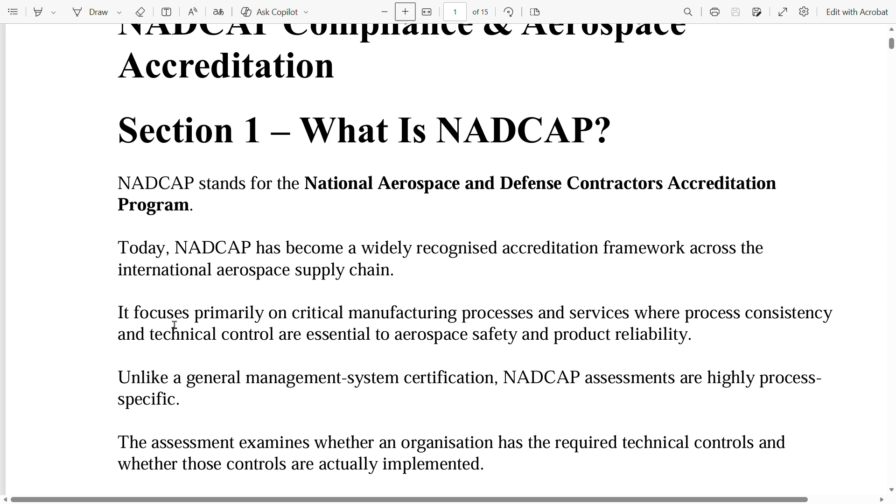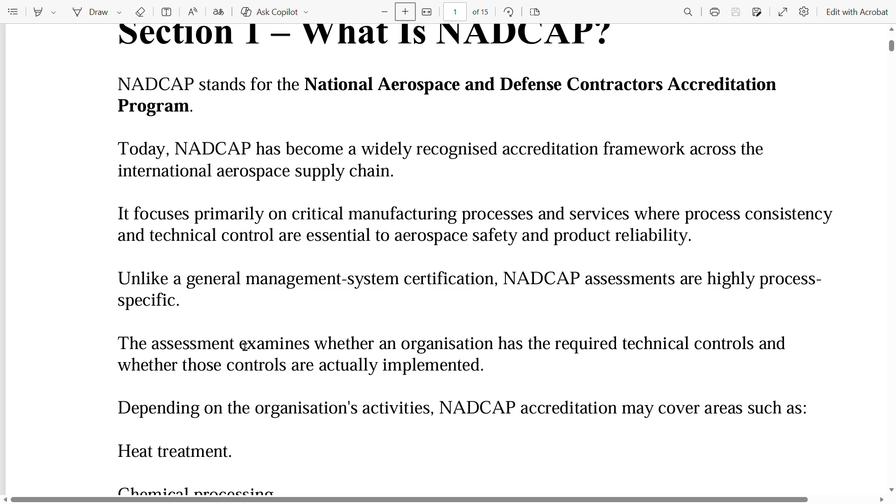Today, NADCAP has become a widely recognized accreditation framework across the international aerospace supply chain. It focuses primarily on critical manufacturing processes and services where process consistency and technical control are essential to aerospace safety and product reliability. Unlike a general management system certification, NADCAP assessments are highly process specific. These assessments examine whether an organization has the required technical controls and whether those controls are actually implemented.

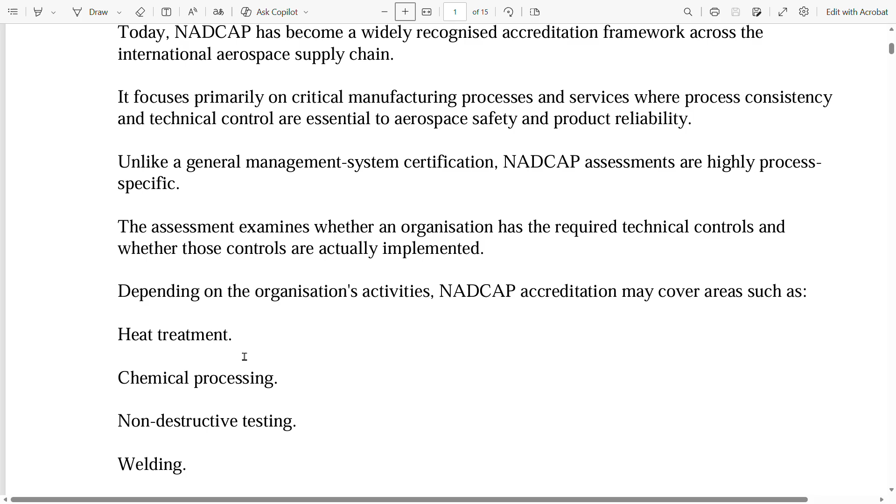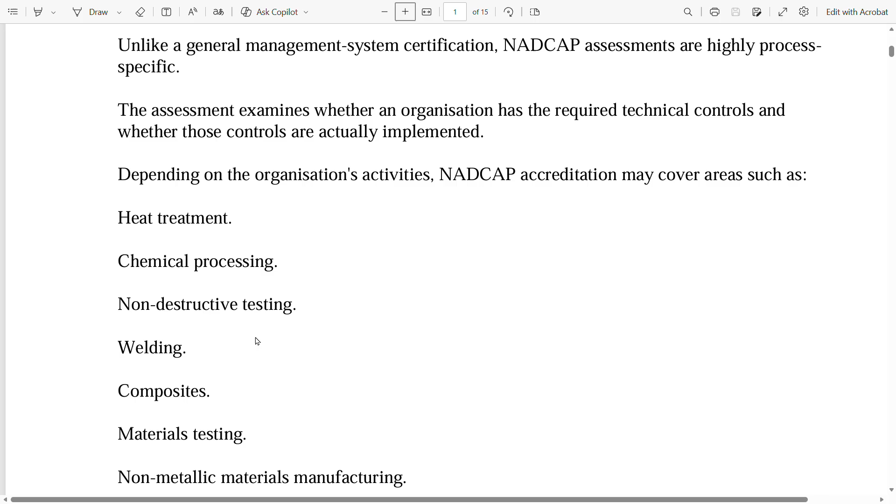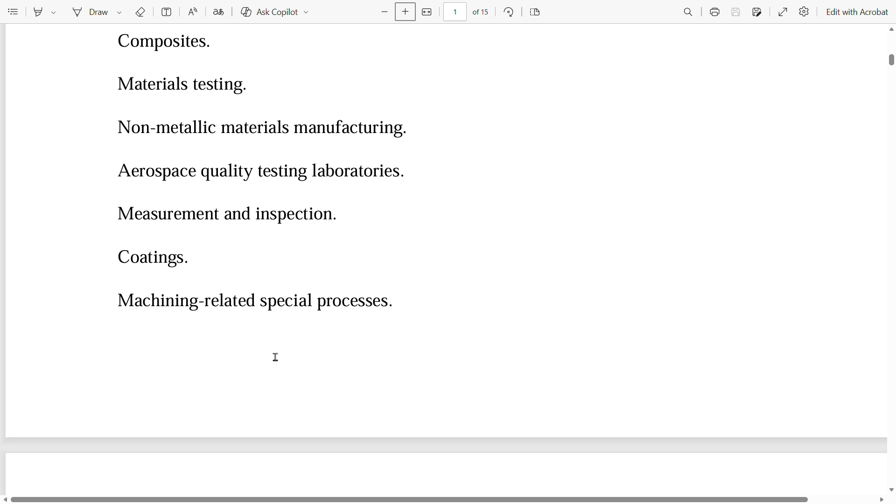Depending on the organization's activities, NADCAP accreditation may cover areas such as heat treatment, chemical processing, non-destructive testing, welding, composites, materials testing, non-metallic materials manufacturing, aerospace quality testing laboratories, measurement and inspection, coatings, machining, related special processes, and other critical aerospace manufacturing and testing activities. The exact accreditation scope depends on the organization's processes and applicable NADCAP requirements.

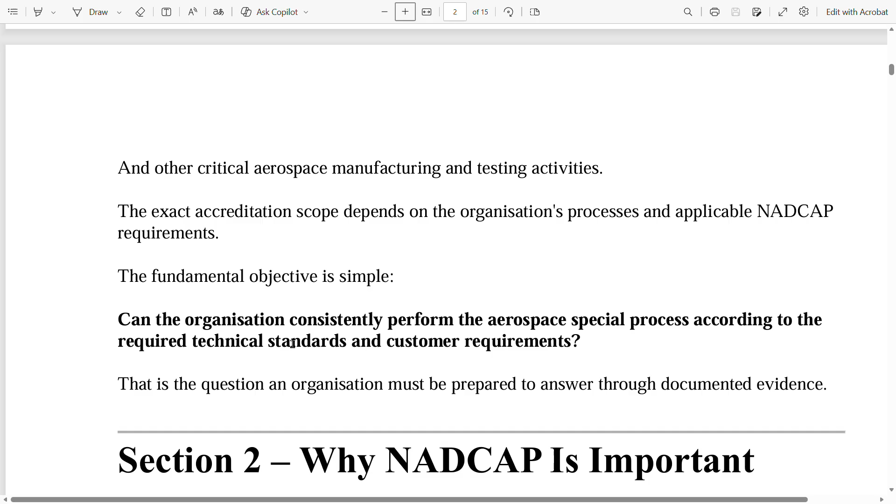The fundamental objective is simple: can the organization consistently perform the aerospace special process according to the required technical standards and customer requirements? That is the question an organization must be prepared to answer through documented evidence.

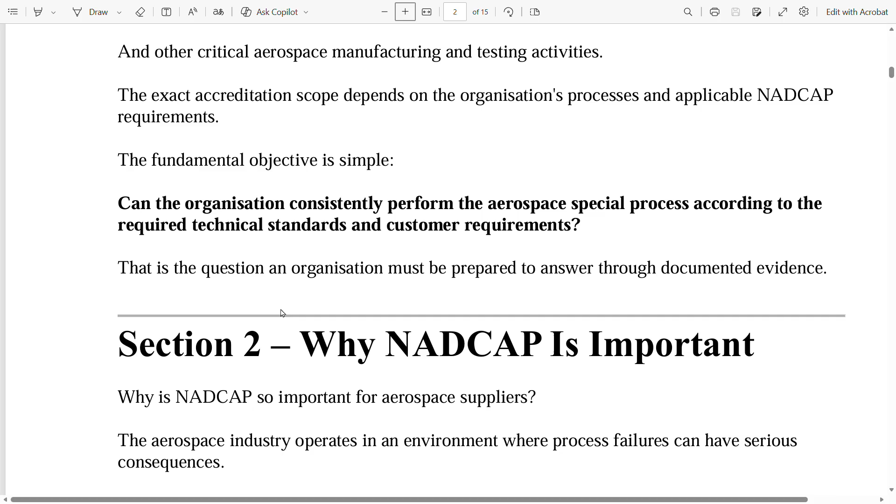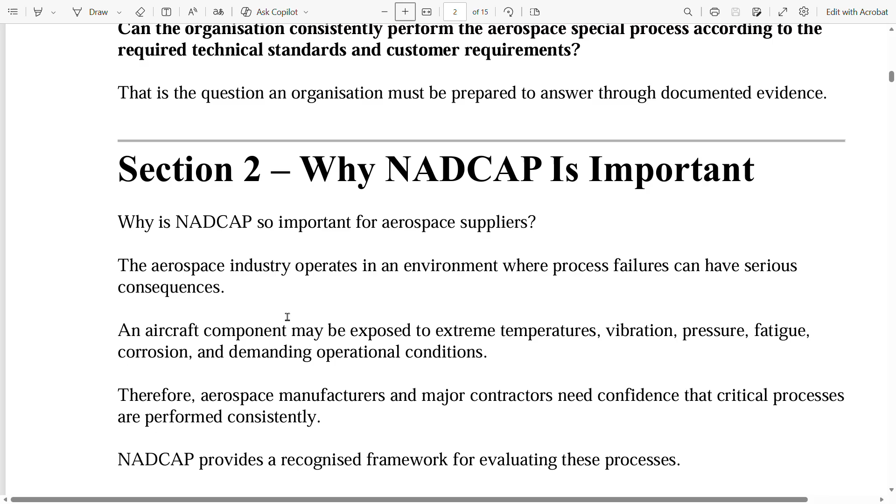Now, why is NADCAP important? Why is it so important for aerospace suppliers? The aerospace industry operates in an environment where process failures can have serious consequences. An aircraft component may be exposed to extreme temperatures, vibration, pressure, fatigue, corrosion, and demanding operational conditions. Therefore, aerospace manufacturers and major contractors need confidence that critical processes are performed consistently.

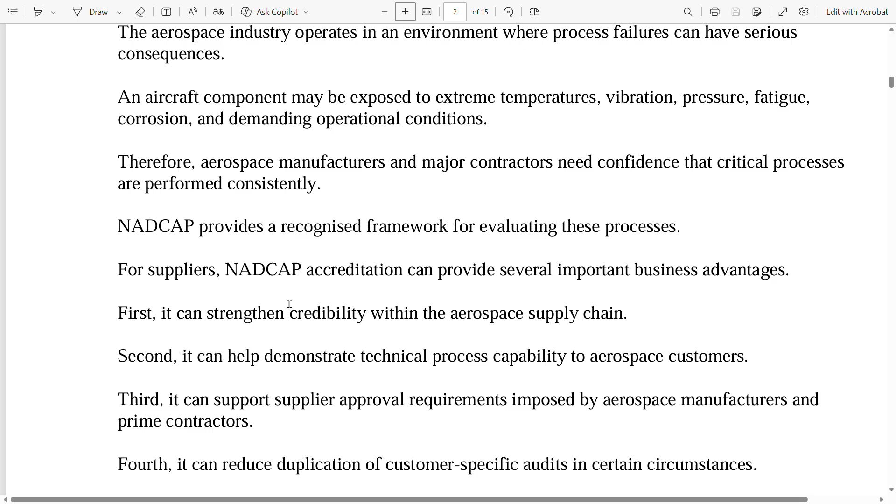NADCAP provides a recognized framework for evaluating these processes. For suppliers, NADCAP accreditation can provide several important business advantages. First, it can strengthen credibility within the aerospace supply chain. Second, it can help demonstrate technical process capability to aerospace customers. Third, it can support supplier approval requirements imposed by aerospace manufacturers and prime contractors.

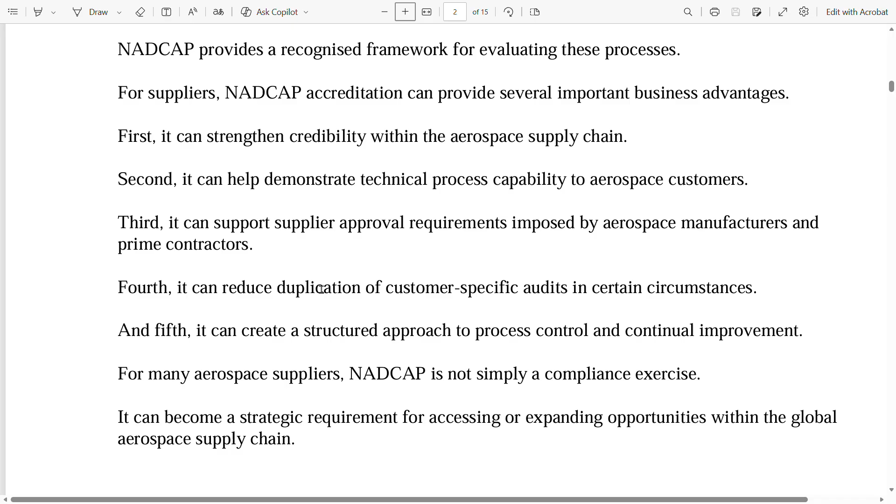Fourth, it can reduce duplication of customer specific audits in certain circumstances. And fifth, it can create a structured approach to process control and continual improvement. For many aerospace suppliers, NADCAP is not simply a compliance exercise. It can become a strategic requirement for accessing or expanding opportunities within the global aerospace supply chain.

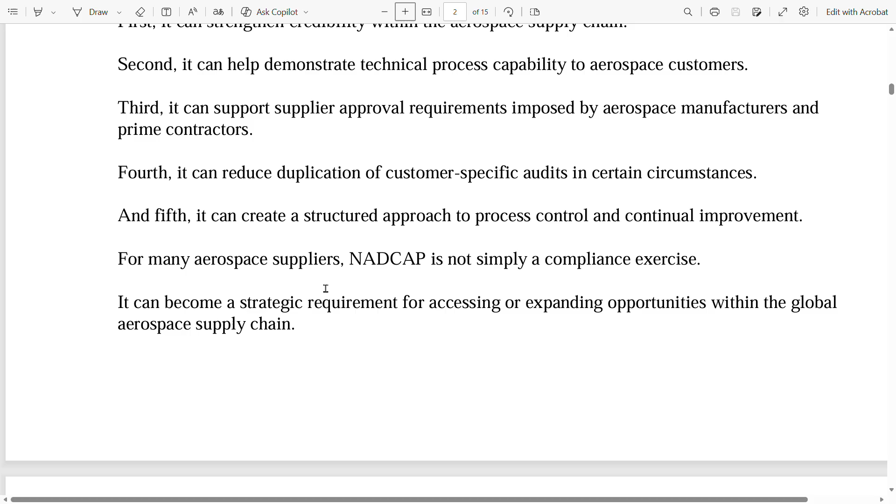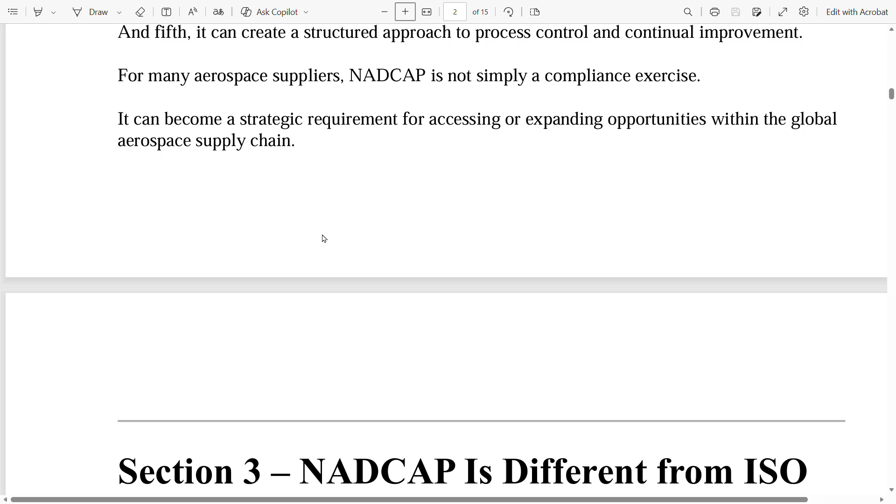Now, Section 3: NADCAP is different from ISO 9001. As we know, ISO 9001 is the standard for quality management system, a generic standard applicable to all organizations. So one common misunderstanding is to consider NADCAP equivalent to ISO 9001. It is not. ISO 9001 focuses on the organization's quality management system. NADCAP focuses much more deeply on specific aerospace processes.

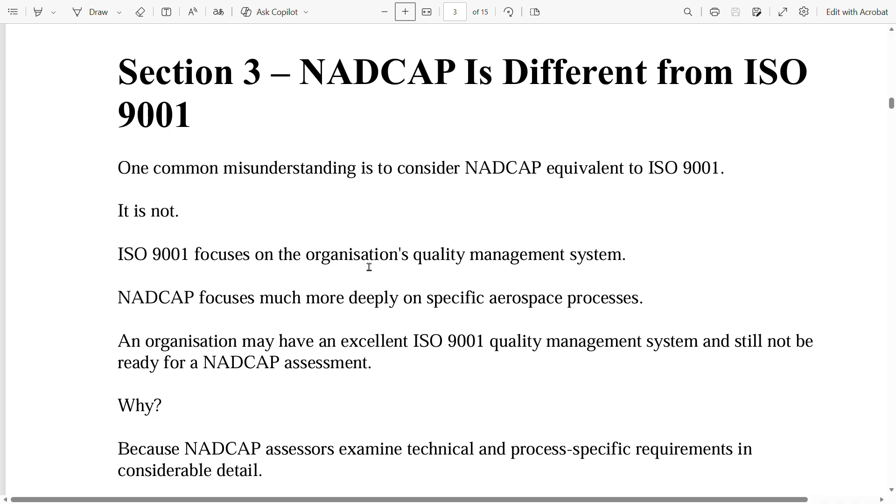An organization may have an excellent ISO 9001 quality management system and still not be ready for a NADCAP assessment. Why? Because NADCAP assessors examine technical and process specific requirements in considerable detail.

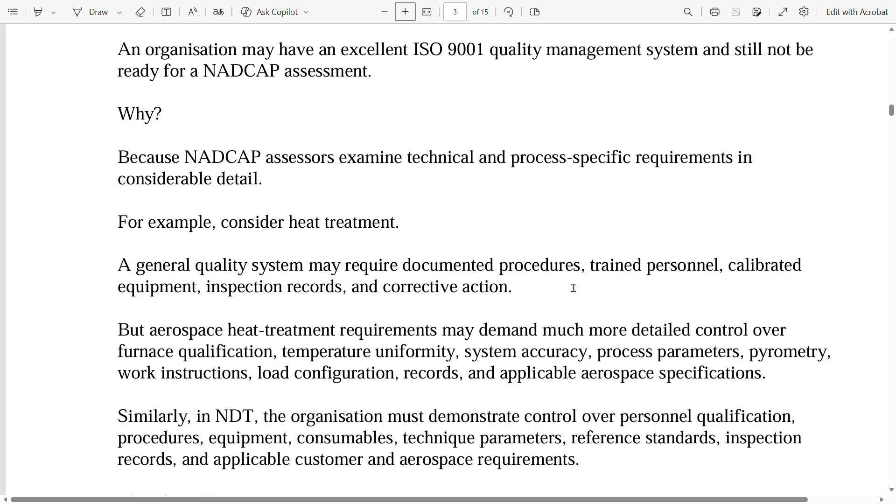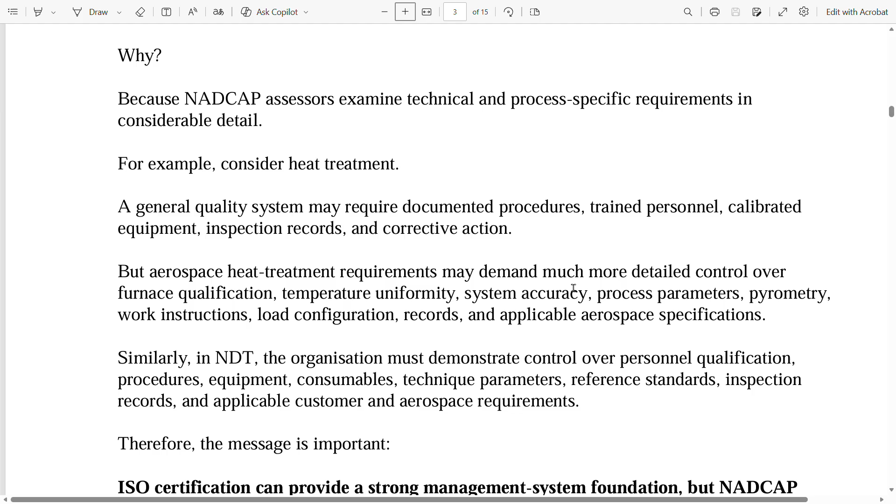For example, consider heat treatment. A general quality system may require documented procedures, trained personnel, calibrated equipment, inspection records, and corrective action. But aerospace heat treatment requirements may demand much more detailed control over furnace qualification, temperature uniformity, system accuracy, process parameters, pyrometry, work instructions, load configuration, records, and applicable aerospace specifications.

Similarly, in NDT, the organization must demonstrate control over personnel qualification, procedures, equipment, consumables, technique parameters, reference standards, inspection records, and applicable customer and aerospace requirements. Therefore, the message is important: ISO certification can provide a strong management system foundation, but NADCAP requires process-specific technical readiness.

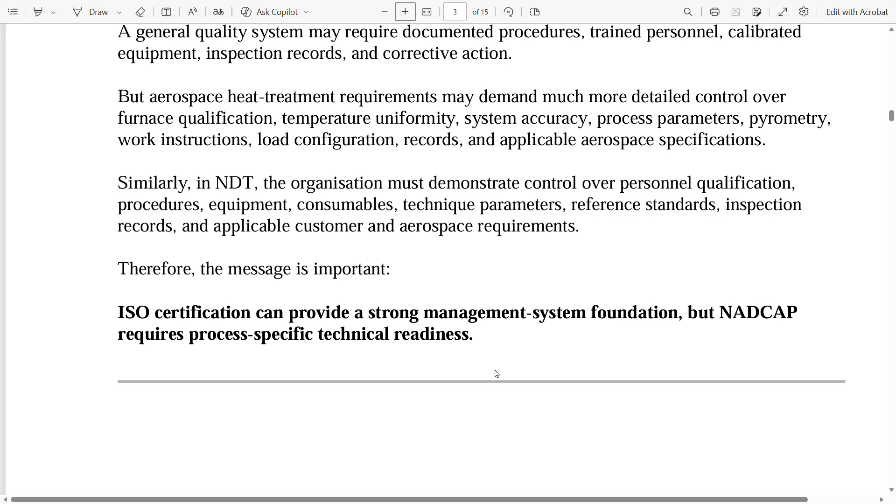Now section 4: major NADCAP process areas. Let us now look at some of the major areas where NADCAP accreditation may apply. First, non-destructive testing, NDT. NDT is a critical aerospace inspection activity.

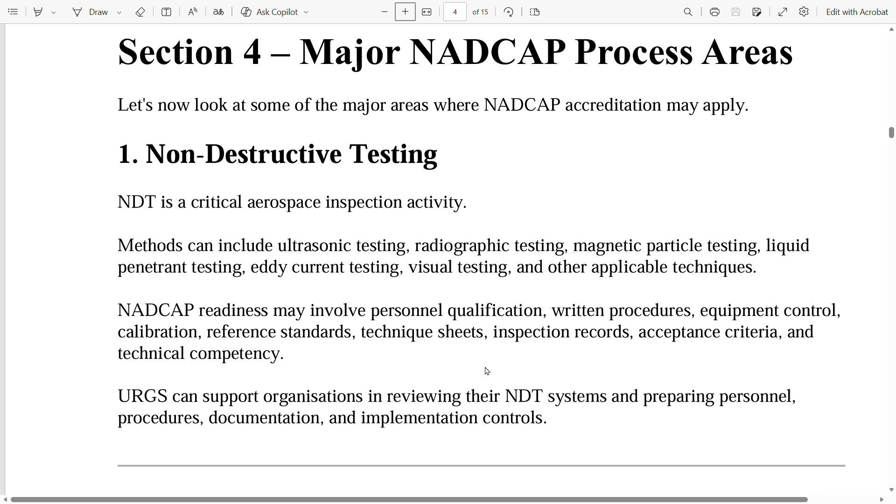Methods can include ultrasonic testing, radiographic testing, magnetic particle testing, liquid penetrant testing, eddy current testing, visual testing, and other applicable techniques. NADCAP readiness may involve personnel qualification, written procedures, equipment control, calibration, reference standards, technique sheets, inspection records, acceptance criteria, and technical competency.

URGS can support organizations in reviewing their NDT systems and preparing personnel, procedures, documentation, and implementation controls.

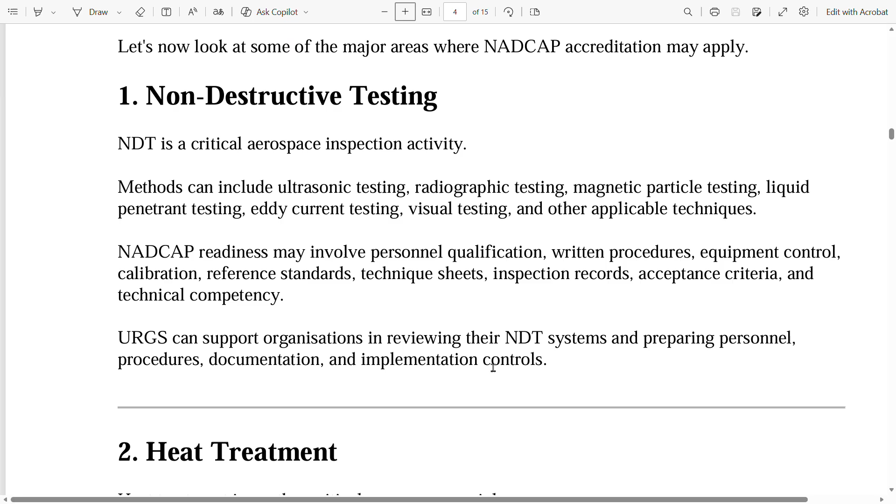Now, second, heat treatment. Heat treatment is another critical aerospace special process. Organizations must demonstrate effective control of furnaces, temperature measurement systems, process parameters, recipes, work instructions, load configurations, calibration, pyrometry, records, and process monitoring.

URGS can support heat treatment organizations through gap assessment, documentation review, internal audits, training, process control evaluation, and corrective action support.

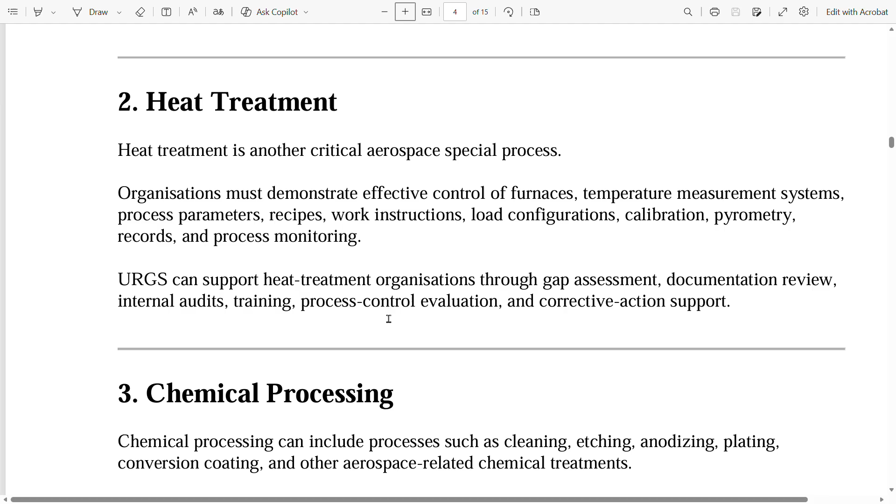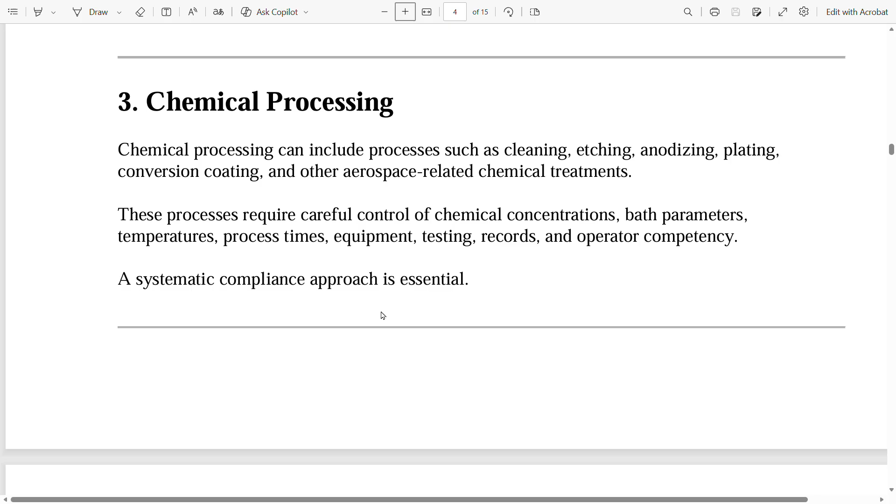Third, chemical processing. Chemical processing can include processes such as cleaning, etching, anodizing, plating, conversion coating, and other aerospace related chemical treatments. These processes require careful control of chemical concentrations, bath parameters, temperatures, process times, equipment, testing, records, and operator competency. A systematic compliance approach is essential.

Fourth, materials testing laboratories. Aerospace laboratories must demonstrate reliable testing capability. This can include mechanical testing, metallography, chemical analysis, hardness testing, microstructural evaluation, and other applicable testing. Laboratory equipment, calibration, test methods, personnel competency, sample identification, traceability, records, and technical procedures all become important.

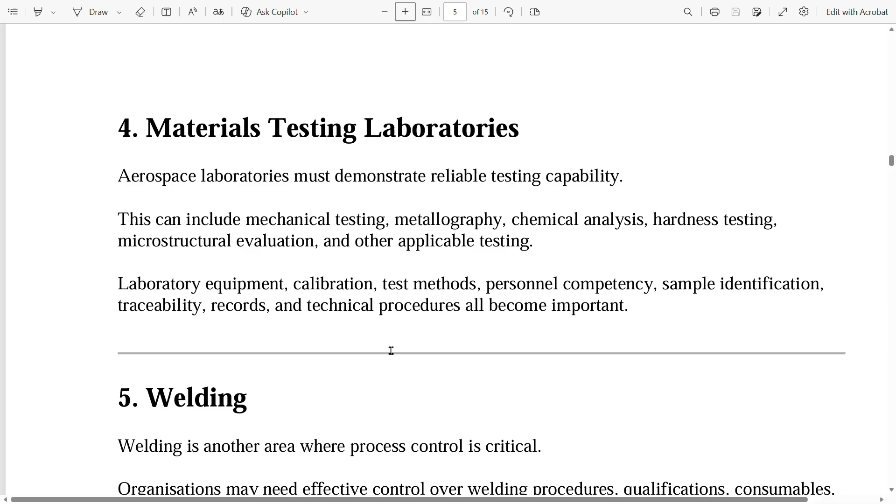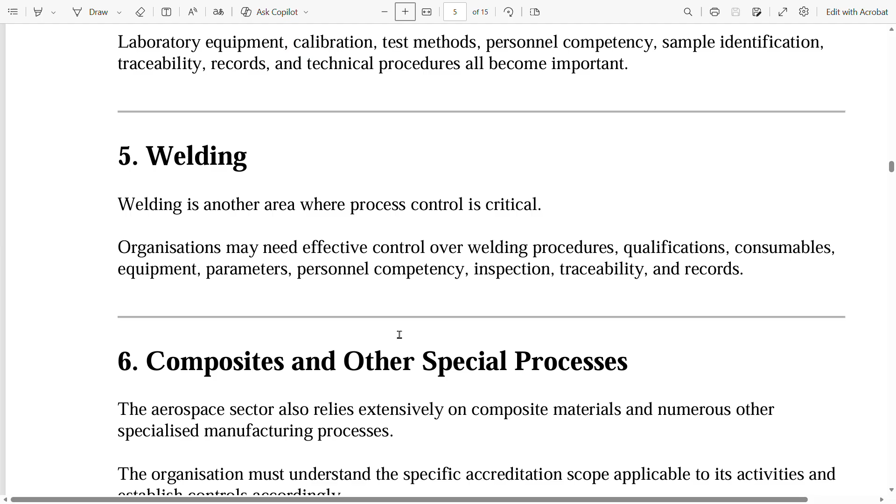Fifth, welding. Welding is another area where process control is critical. Organizations may need effective control over welding procedures, qualifications, consumables, equipment, parameters, personnel competency, inspection, traceability, and records. Then sixth, composites and other special processes.

The aerospace sector also relies extensively on composite materials and numerous other specialized manufacturing processes. The organization must understand the specific accreditation scope applicable to its activities and establish controls accordingly. The key principle remains the same: define the process, control the process, demonstrate the process, and retain objective evidence.

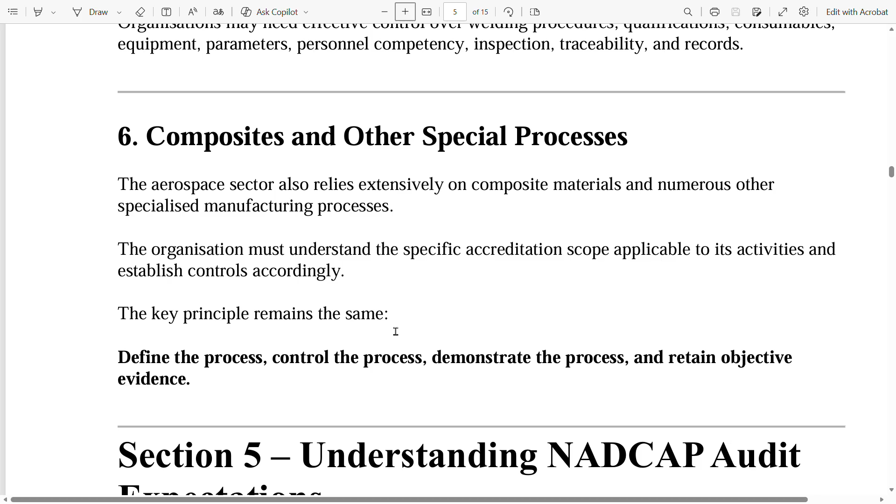Now section 5, understanding NADCAP audit expectations. NADCAP assessments are evidence driven. It is not enough to tell an assessor that a process is controlled. The organization must be able to demonstrate it.

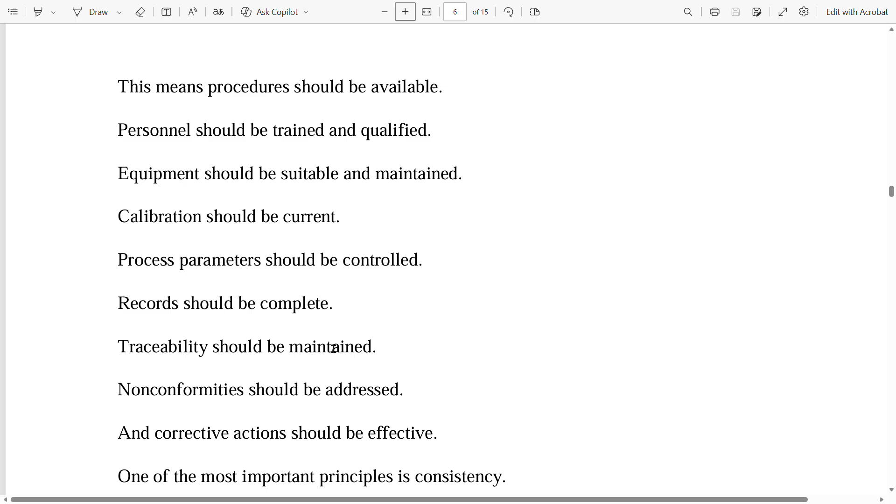This means procedures should be available, personnel should be trained and qualified, equipment should be suitable and maintained, calibration should be current, process parameters should be controlled, records should be complete, traceability should be maintained, non-conformities should be addressed, and corrective actions should be effective.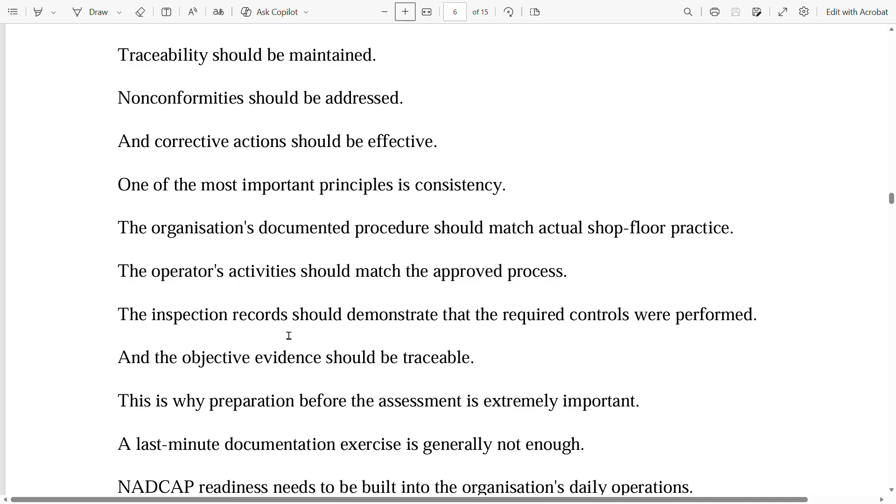One of the most important principles is consistency. The organization's documented procedures should match actual shop floor practice. The operator's activities should match the approved process. The inspection records should demonstrate that the required controls were performed, and the objective evidence should be traceable.

This is why preparation before the assessment is extremely important. A last-minute documentation exercise is generally not enough. NADCAP readiness needs to be built into the organization's daily operations.

Now section 6, common NADCAP compliance challenges. What are some common challenges organizations face while preparing for NADCAP? Let us discuss several challenges. Challenge 1, incomplete gap assessment. Some organizations start preparing documents without first understanding the complete requirements. A detailed gap assessment should come first.

Challenge 2, procedure and practice mismatch. A procedure may say one thing while employees perform another. This creates a serious compliance weakness.

Challenge 3, inadequate objective evidence. A process may actually be performed correctly, but if records are incomplete, the organization may struggle to demonstrate compliance. Objective evidence is a must, meaning proper documentation is mandatory.

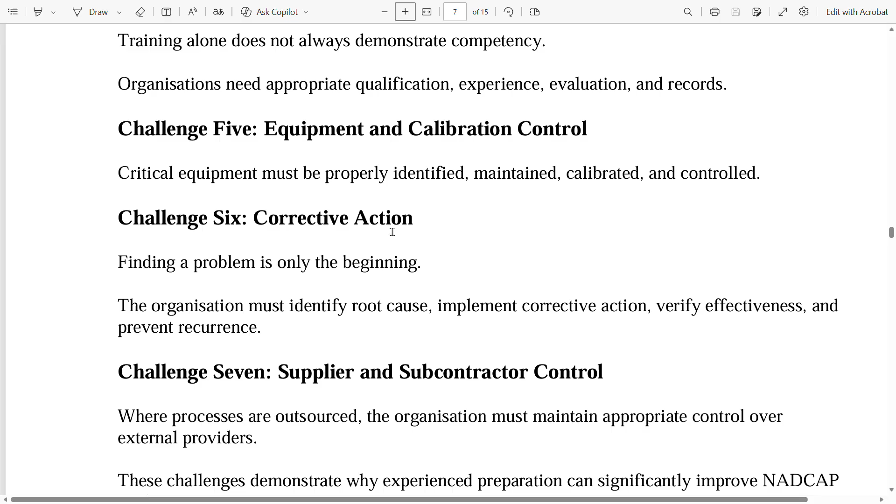Challenge 7, supplier and subcontractor control. Where processes are outsourced, the organization must maintain appropriate control over external providers. These challenges demonstrate why experienced preparation can significantly improve NADCAP readiness.

Now section 7, how URGS can support NADCAP compliance. This brings us to an important question: how can URGS International Certification and Inspection Private Limited support organizations worldwide preparing for NADCAP? URGS can provide structured consulting, inspection, training, auditing, and technical support for organizations worldwide. Our approach can be customized according to the organization's NADCAP scope, current maturity, processes, customer requirements, and assessment objectives.

Step 1, initial consultation. What we do here: we begin by understanding the organization, what aerospace processes are being performed, what is the intended NADCAP scope, which customers are being served, which aerospace standards and specifications apply, what procedures already exist, what technical resources are available, and what is the organization's target assessment timeline. This initial understanding helps establish a practical implementation roadmap.

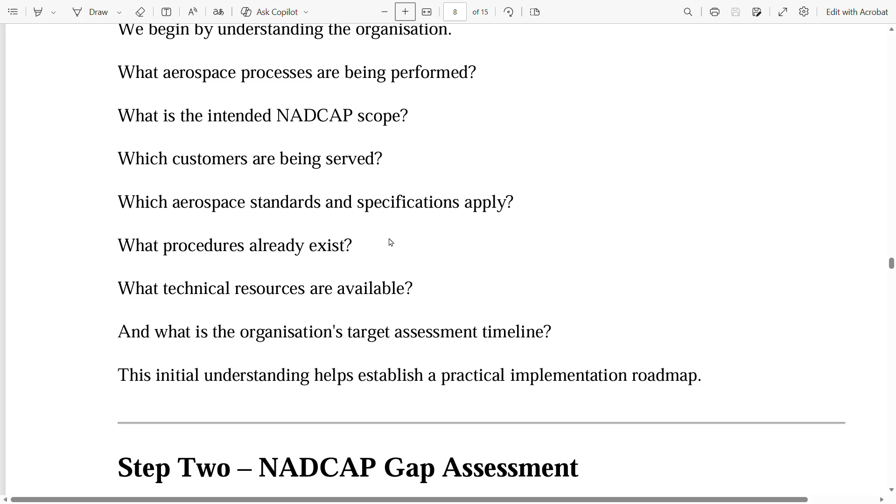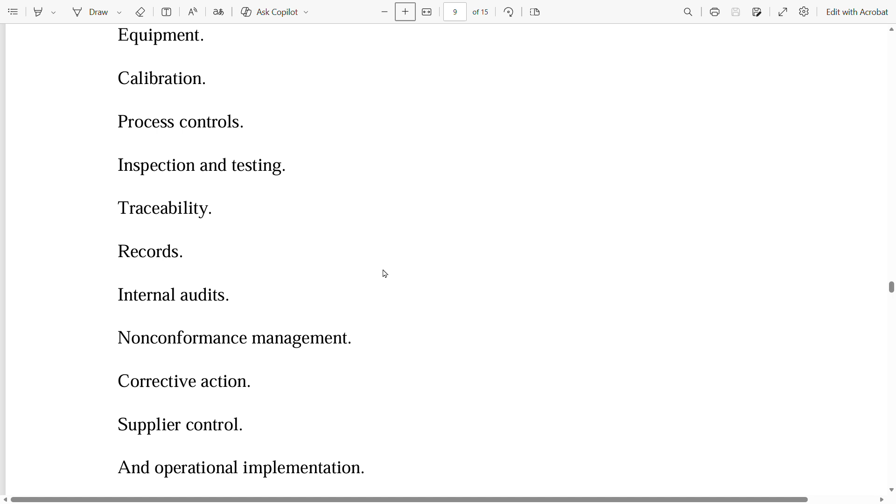Step 2, NADCAP gap assessment. URGS can conduct a structured gap assessment against applicable NADCAP requirements and process specific criteria. The assessment can examine documentation, procedures, personnel competency, equipment, calibration, process controls, inspection and testing, traceability, records, internal audits, non-conformance management, corrective action, supplier control, and operational implementation. The objective is to identify gaps before the formal assessment.

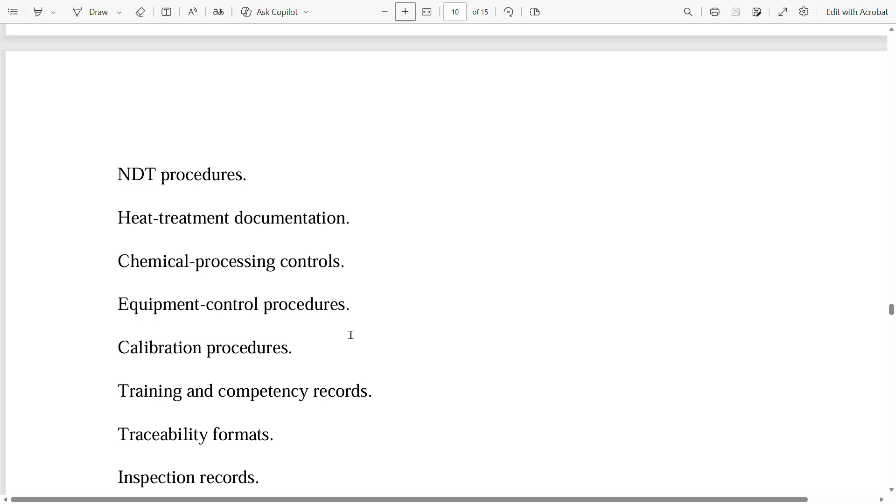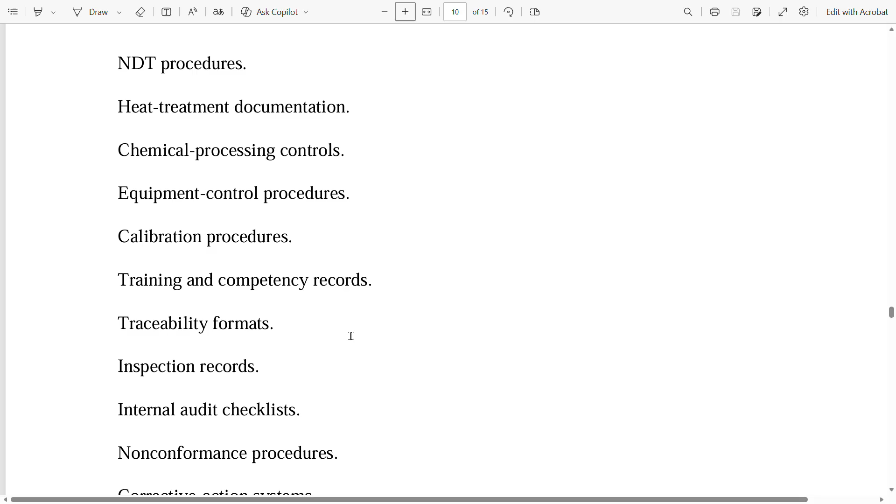Step 3, documentation development and review. URGS can support organizations with development, review, and improvement of relevant documentation. This may include quality procedures, process procedures, work instructions, inspection procedures, NDT procedures, heat treatment documentation, chemical processing controls, equipment control procedures, calibration procedures, training and competency records, traceability formats, inspection records, internal audit checklists, non-conformance procedures, corrective action systems, and process-specific documentation. Documentation should always be aligned with the organization's actual activities and applicable requirements.

Step 4, personnel training. People are at the center of process compliance.

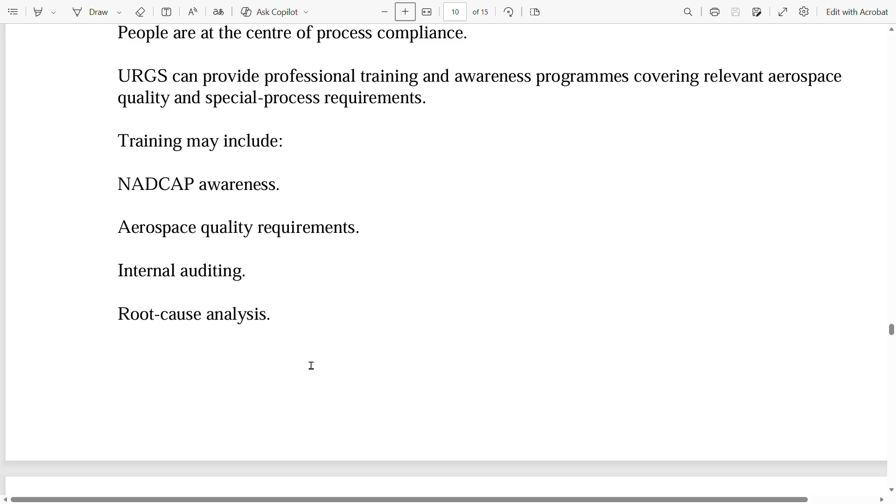URGS can provide professional training and awareness programs covering relevant aerospace quality and special process requirements. Training may include NADCAP awareness, aerospace quality requirements, internal auditing, root cause analysis, corrective action, NDT, metallurgy, heat treatment, metallography, inspection techniques, process control, quality documentation, and other technical subjects relevant to the organization's scope.

Now step 5, internal audit and mock assessment. One of the most valuable services URGS can provide is an independent pre-assessment. A mock NADCAP assessment can simulate the type of evidence and questioning that an organization may encounter during an actual assessment.

URGS auditors can review process implementation, records, personnel qualification, equipment, calibration, technical procedures, software practices, traceability, objective evidence, and corrective action effectiveness. The purpose is not simply to identify problems, it is to give the organization an opportunity to correct them before the formal assessment.

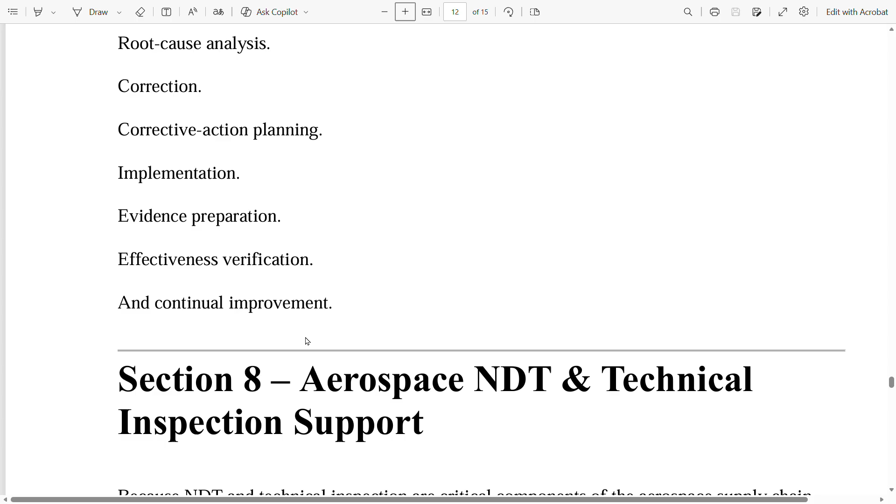Now step 6, corrective action support. If gaps or non-conformities are identified, URGS can support organizations in analyzing the root causes. Corrective action should address the actual cause rather than simply correcting the immediate symptom. URGS can support root cause analysis, correction, corrective action planning, implementation, evidence preparation, effectiveness verification, and continual improvement.

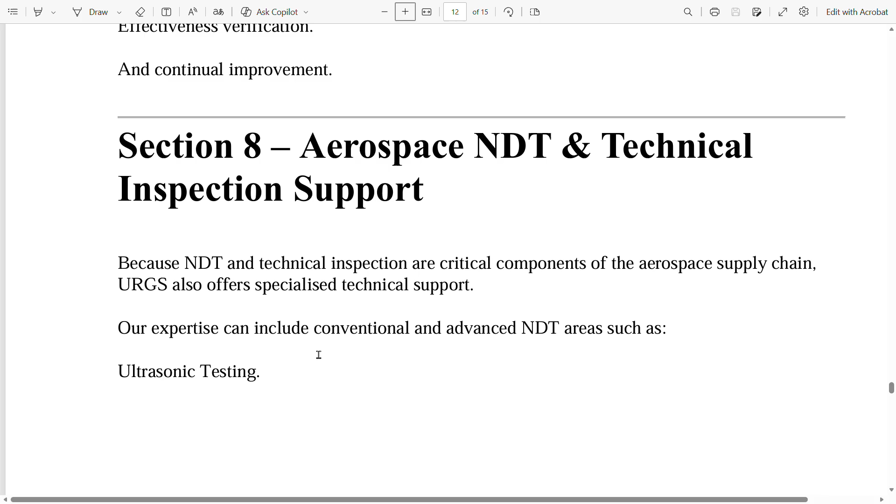Now section 8, aerospace NDT and technical inspection support. Because NDT and technical inspection are critical components of the aerospace supply chain, URGS also offers specialized technical support.

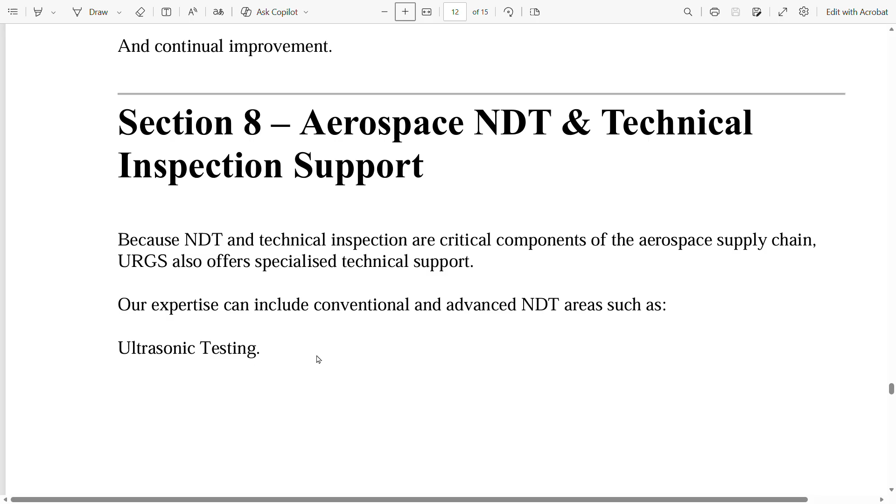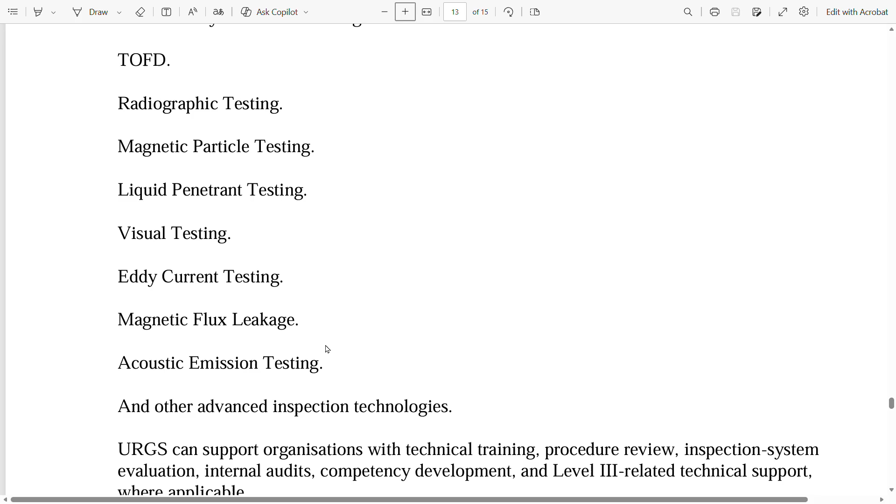Our expertise can include conventional and advanced NDT areas such as ultrasonic testing, phased array ultrasonic testing, TOFD, radiographic testing, magnetic particle testing, liquid penetrant testing, visual testing, eddy current testing, magnetic flux leakage, acoustic emission testing, and other advanced inspection technologies. URGS can support organizations with technical training, procedure review, inspection system evaluation, internal audits, competency development, and level 3 related technical support where applicable.

For aerospace organizations, the objective is always to combine technical competence with disciplined process control.

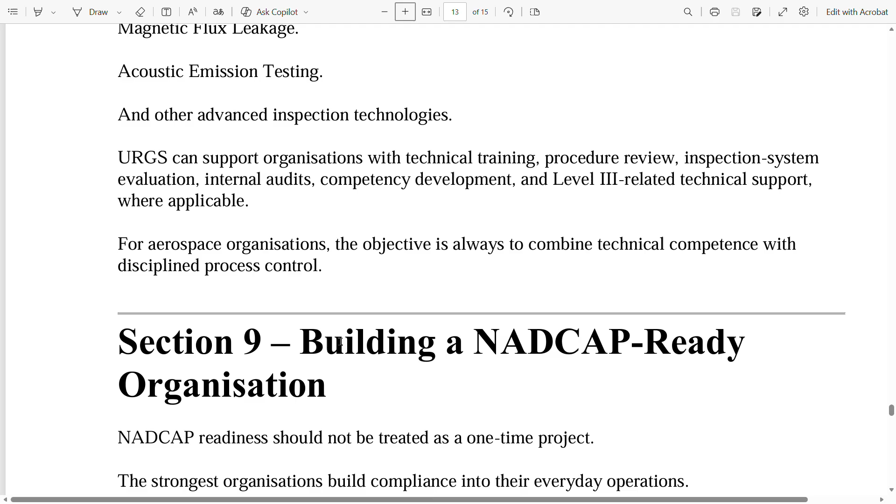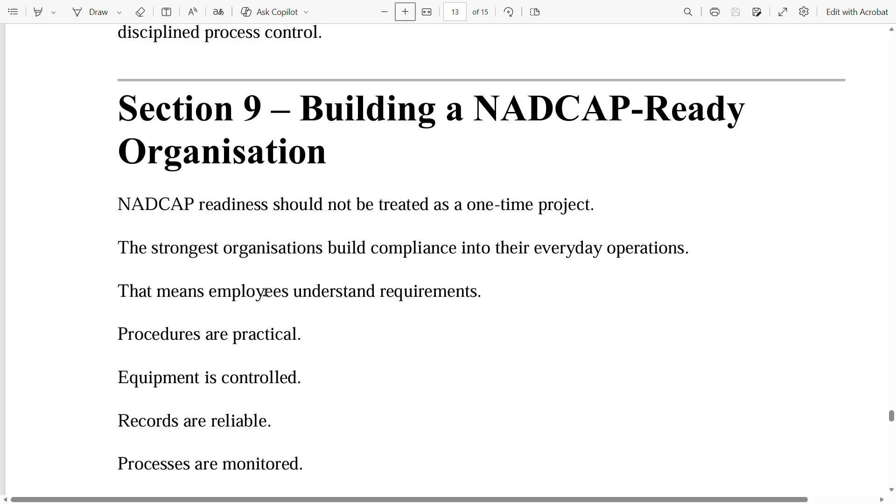Now section 9, building a NADCAP ready organization. NADCAP readiness should not be treated as a one-time project. The strongest organizations build compliance into their everyday operations. That means employees understand requirements, procedures are practical, equipment is controlled, records are reliable, processes are monitored, internal audits are effective.

Non-conformities are analyzed, corrective actions are verified, and management continually evaluates performance. The ultimate goal is to create a culture where quality and technical compliance are part of the manufacturing process itself.

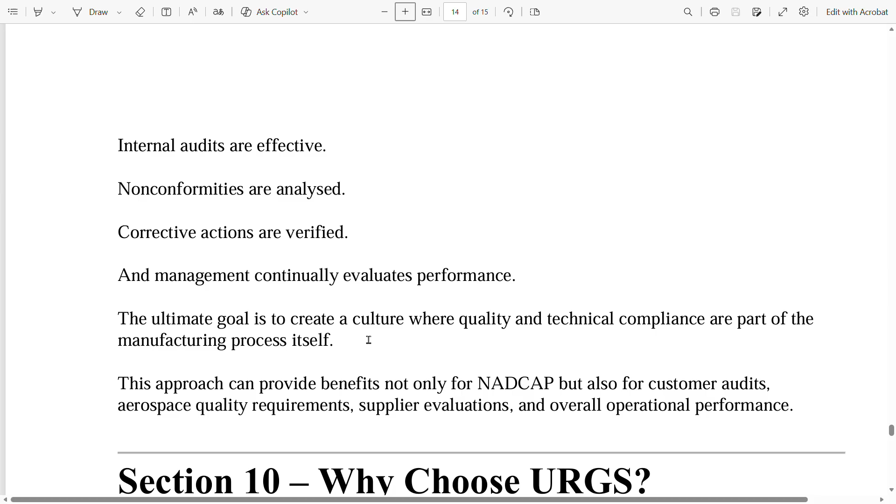This approach can provide benefits not only for NADCAP but also for customer audits, aerospace quality requirements, supplier evaluations, and overall operational performance.

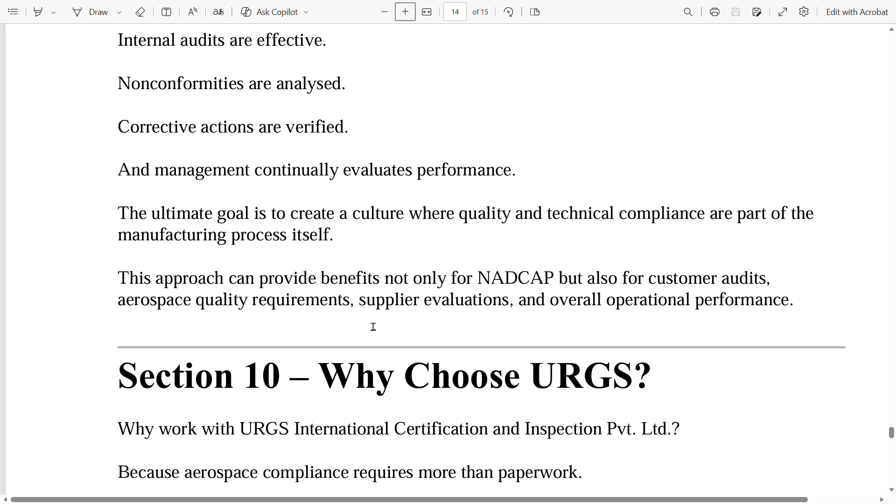Now section 10, why choose URGS? Why work with URGS International Certification and Inspection Private Limited? Because aerospace compliance requires more than paperwork. It requires understanding of processes, inspection, quality systems, technical requirements, personnel competency, and objective evidence.

URGS International brings together consulting, certification support, inspection, auditing, technical training, and engineering expertise. Our services can be structured according to your organization's requirements.

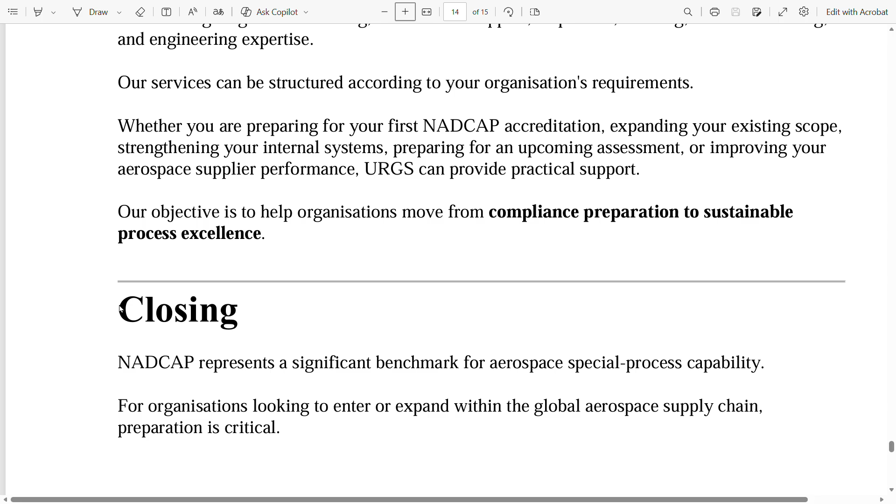Whether you are preparing for your first NADCAP accreditation, expanding your existing scope, strengthening your internal systems, preparing for an upcoming assessment, or improving your aerospace supplier performance, URGS can provide practical support. Our objective is to help organizations move from compliance preparation to sustainable process excellence.

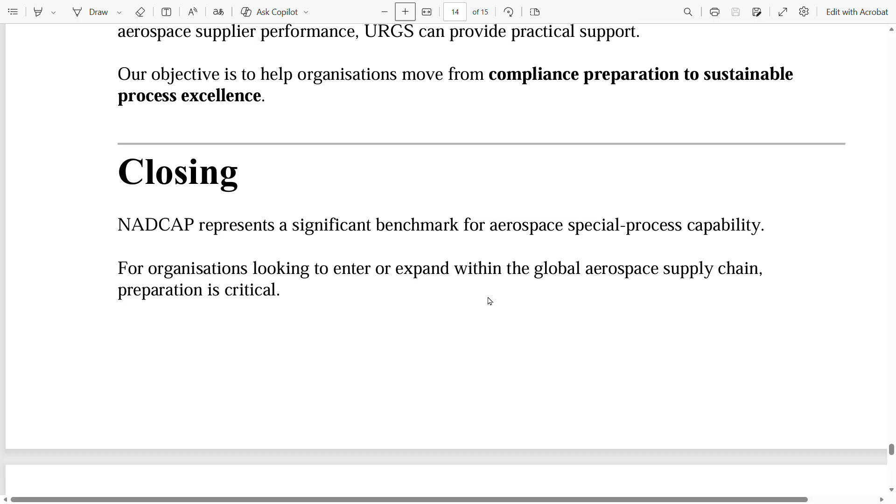Now closing. NADCAP represents a significant benchmark for aerospace special process capability. For organizations looking to enter or expand within the global aerospace supply chain, preparation is critical.

The right approach begins with understanding the applicable requirements, conducting a detailed gap assessment, strengthening technical processes, developing competent personnel, implementing effective documentation, conducting internal audits, and ensuring that objective evidence is consistently available.

URGS International Certification and Inspection Private Limited is ready to support aerospace organizations worldwide with NADCAP compliance consulting, gap assessment, technical inspection, internal auditing, training, documentation support, corrective action assistance, and aerospace quality solutions.